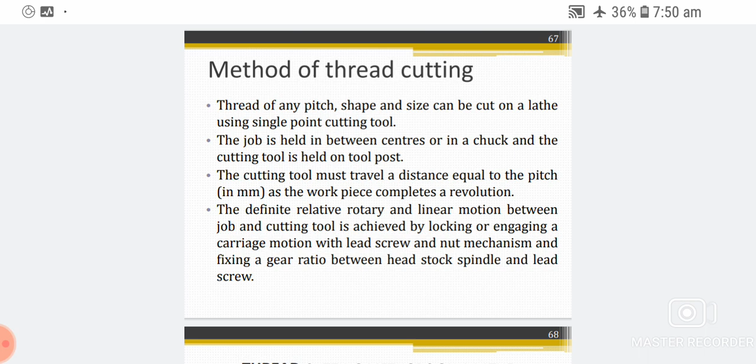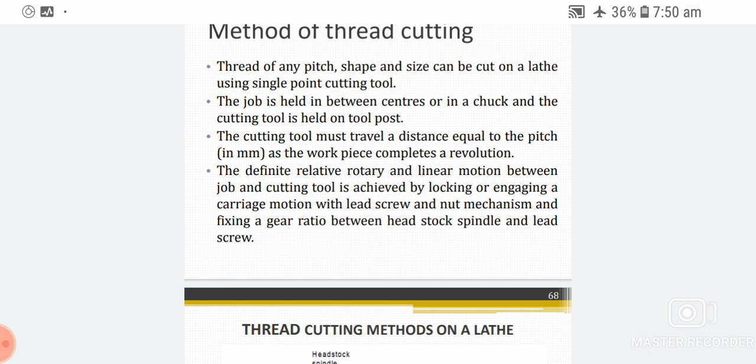completes a revolution. The definite relative rotary and linear motion between job and cutting tool is achieved by locking or engaging the carriage motion with the lead screw and nut mechanism, and fixing a gear ratio between the headstock spindle and lead screw. Thread cutting methods.

Thread cutting methods on a lathe. This is called a gearbox. The headstock spindle connects the workpiece, and the tailstock.

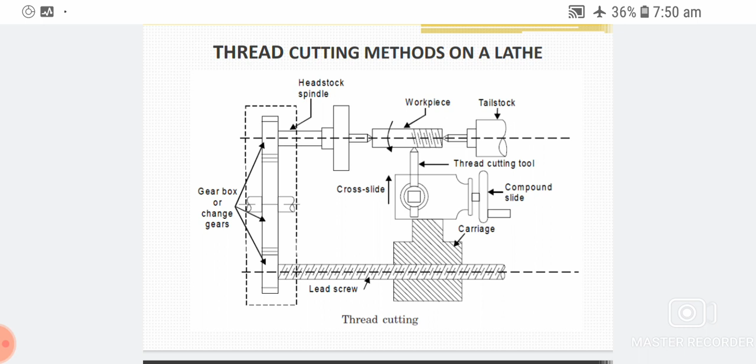Thread cutting tools are fixed on the carriage, the compound slide, cross slide at the top holds the thread cutting tools. The special attachments in a center lathe.

Special attachment: each general purpose conventional machine tool is designed and used for a set of specific machining work on jobs of limited range of shape and size.

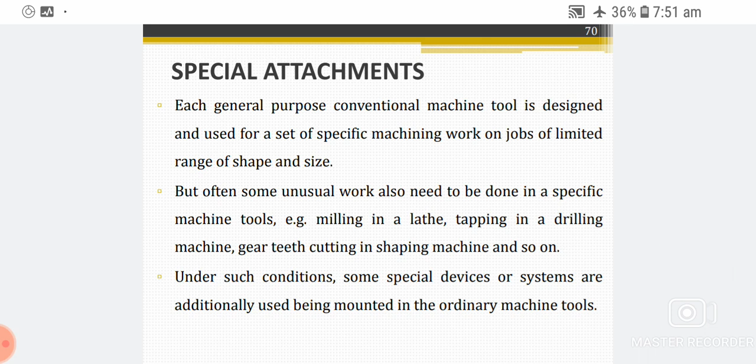But often some unusual work also needs to be done on a specific machine tool - milling in a lathe, tapping in a drilling machine, gear tooth cutting in a shaping machine, and so on. Under such conditions, some special devices or systems are additionally used, being mounted on the ordinary machine tools.

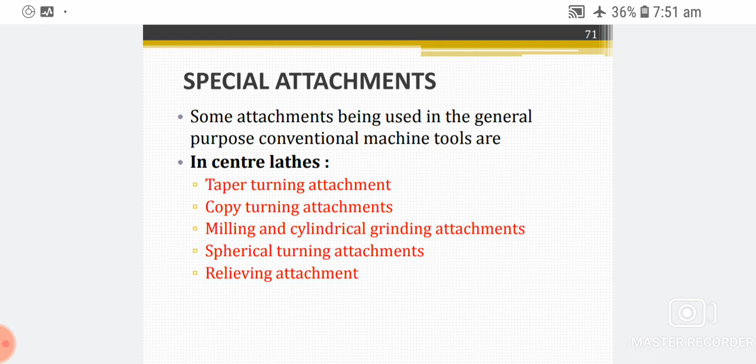Special attachment: some attachments being used in general purpose conventional machine tools in the center lathe - taper turning attachment, copy turning attachment, milling and cylindrical grinding attachments, spherical turning attachment, relieving attachment.

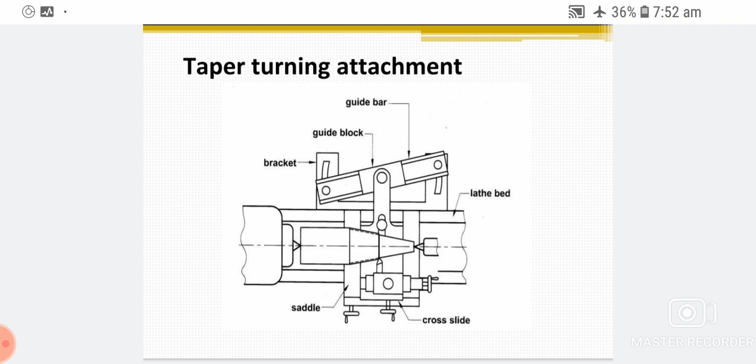Taper turning attachment: guide bar, guide block, bracket, copy turning attachment.

For complex contours, the tool should be fed into two axes simultaneously. This is called copy turning attachment.

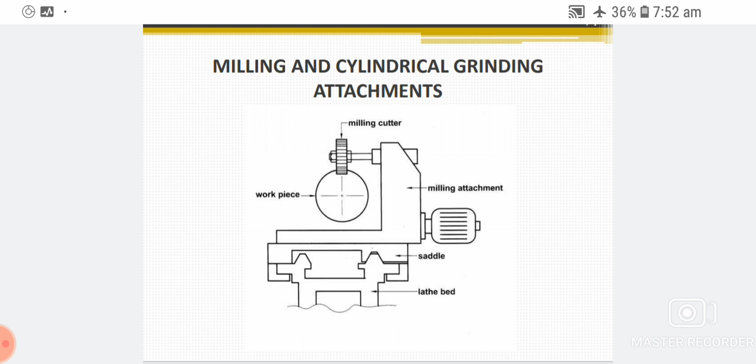Next, another one: milling and cylindrical grinding attachment. This is the work process on the milling and cylindrical grinding attachment. This is the lathe bed, the top of the saddle, and the milling attachment - milling cutter with the workpiece.

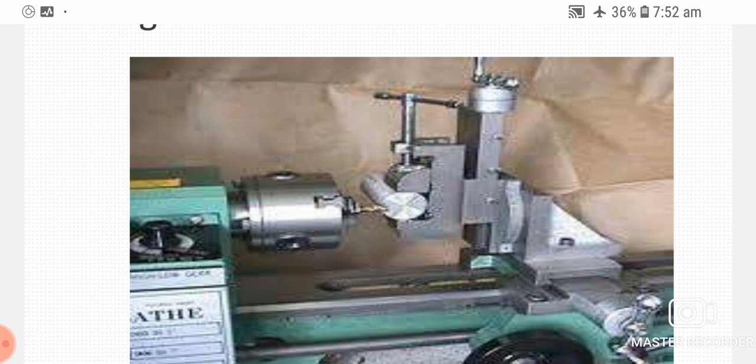Milling attachment: these are the pictures of the milling attachment. The workpiece is fixed and clamped to the lead screw, and the cutting tool rotates to move towards the drilling operation or milling operation.

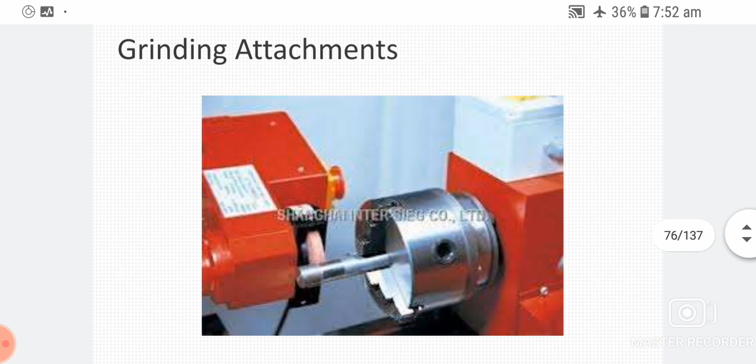Milling operation, grinding attachment: this is the workpiece moving on the grinding attachment, and the spherical turning attachment.

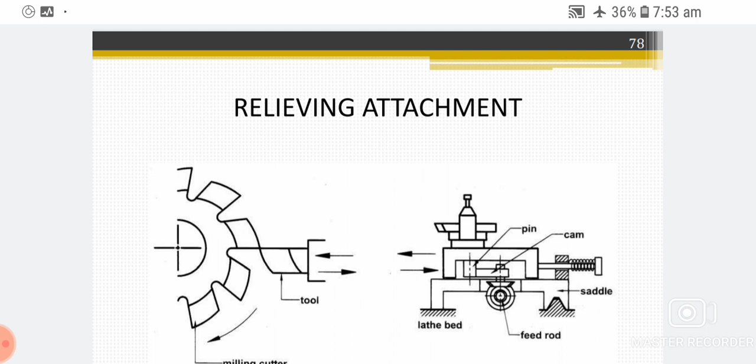Another one, the relieving attachment. Relieving attachment means this is the gear type of wheel, this is the blade using the relieving attachment. This is the lathe involved in the relieving attachment.

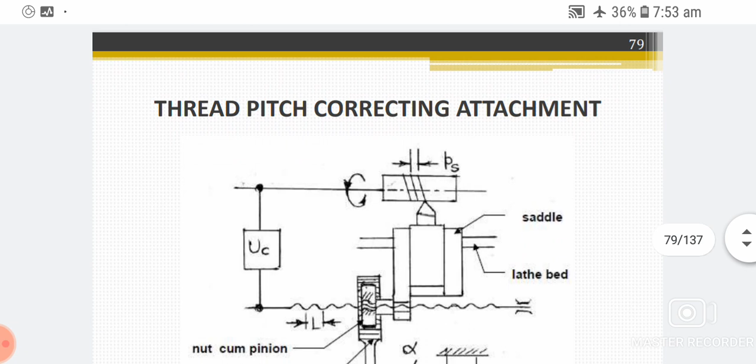Thread pitch correcting attachment: this is involved in the screw threads, saddle, lathe bed attachment. Next, the gear arrangement.

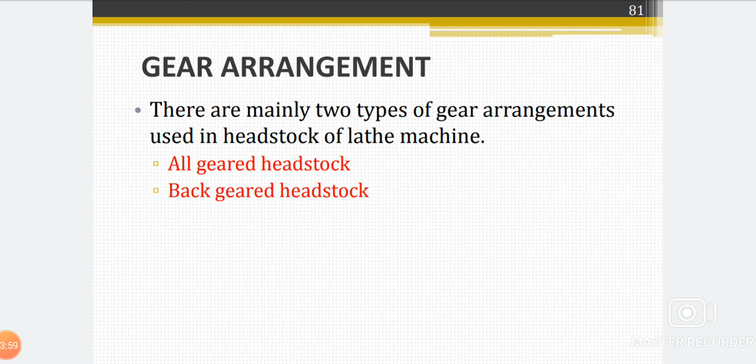Next we have discussed about the gear arrangement. There are mainly two types of gear arrangements used in the headstock of a lathe machine: all geared headstock, and back geared headstock.

All geared headstock gear arrangement: in this type, constant motor speed is provided to the gear arrangement, but depending upon the requirement of speed, it changes using the gear arrangement, which is controlled by levers. These levers change their position to generate different combinations to acquire different speeds.

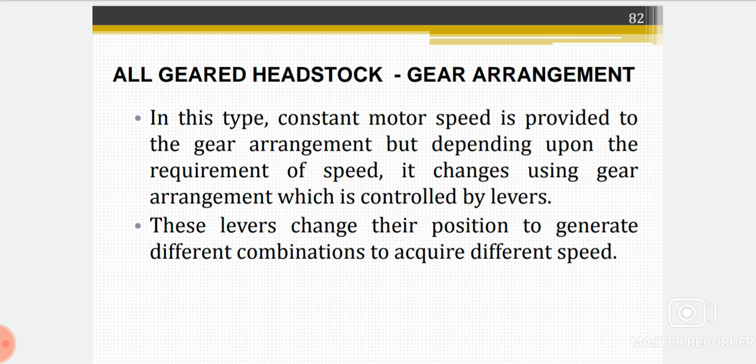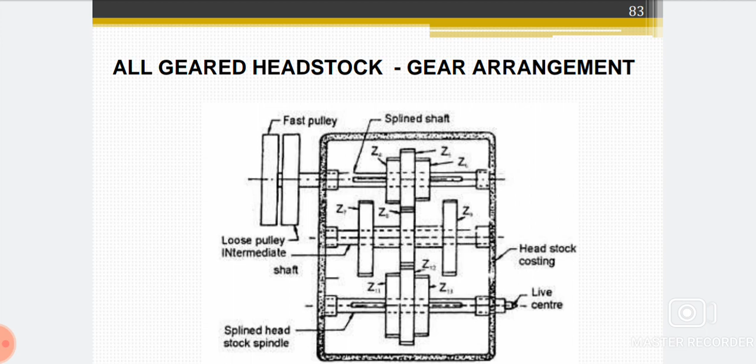All geared headstock gear arrangement: fast pulley, splined shaft, loose pulley, intermediate shaft, live centre, splined headstock spindle. Back geared headstock gear arrangement.

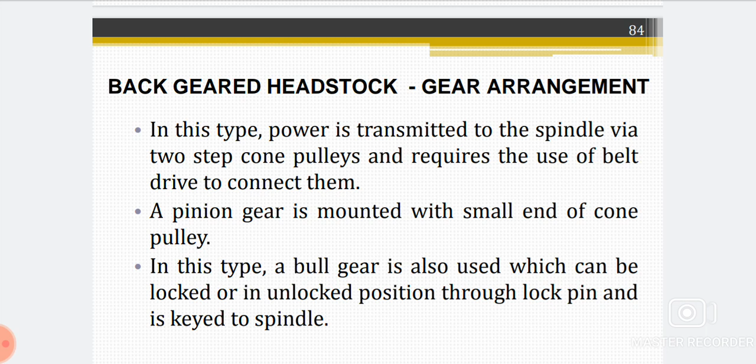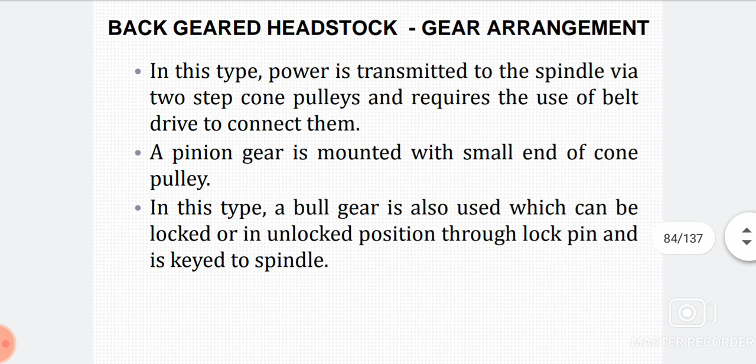In this type, power is transmitted to the spindle via two-step cone pulleys, requiring the use of a belt drive to connect them. A pinion gear is mounted on the small end of the cone pulley. In this type, a bull gear is also used, which can be locked or unlocked in position through the lock pin, keyed to the spindle.

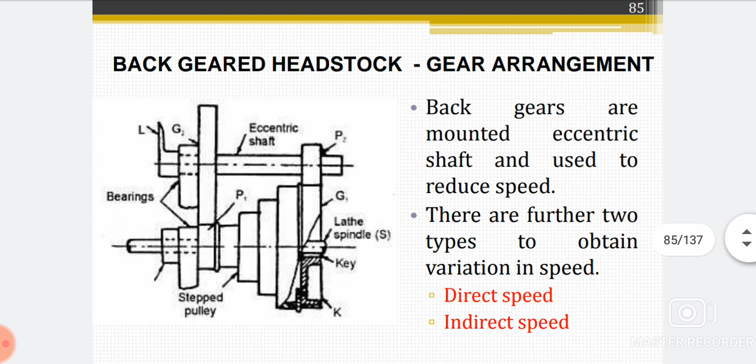Back geared headstock gear arrangement: back gears are mounted on an eccentric shaft and used to reduce speed. There are further two types to obtain variation in speed: direct speed and indirect speed. This is a back geared headstock.